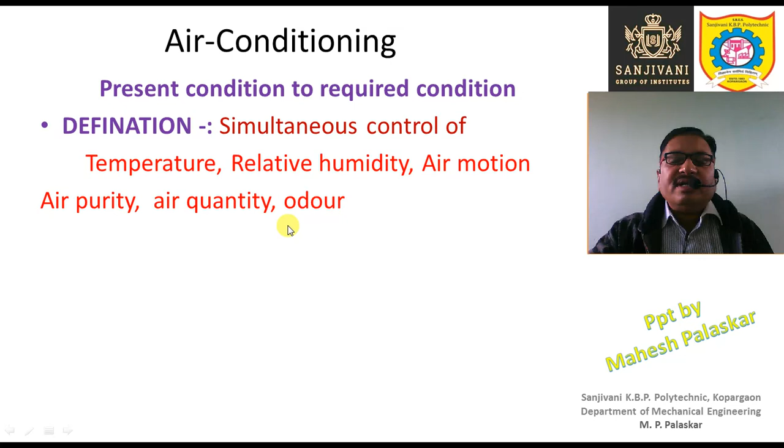These parameters are temperature, relative humidity, air motion, air purity, sometimes even air quantity or the density or the pressure of the air, and also in some cases the odor or the fragrance of the air. So all these factors are simultaneously controlled, and that is nothing but air conditioning. So simultaneous control of temperature, relative humidity, air motion, air purity, air quantity, odor is called as air conditioning.

Now air conditioning may be comfort air conditioning or industrial air conditioning. So for human comfort, mainly air conditioning is used. So what are the values of these various parameters for human comfort? The temperature should be between 21 degree centigrade to 25 degree centigrade for human comfort, and we are maintaining the relative humidity between 40% to 60% so that the human beings feel comfortable. Then the air motion should be between 5 meter per minute to 8 meter per minute, right?

So if the temperature is between 21 to 25 degrees centigrade, then we neither feel hot nor we feel cold. And if the relative humidity is say less than 40% or less than 35%, then we feel very dry, right? Or if the relative humidity is more than 60%, then the environment becomes sticky. Our body becomes sticky and we start sweating. So that environment we can experience in places like Bombay.

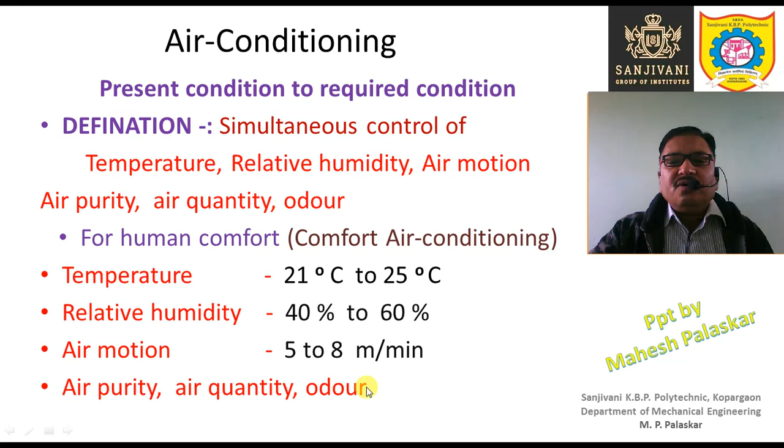And the velocity of the air should not be too high, not be too less for human comfort. So it should be between 5 to 8 meter per minute. Then the air should be pure. Then the air pressure or the quantity, that is the density of the air, should be optimum, around 1 atmosphere. Then there should be no bad smell in the air, or the unwanted odor should not be present in the air. So all these factors related with the moist air around us are controlled simultaneously, and that is nothing but air conditioning.

Now let us study the classification as well as the applications of air conditioning. So while studying the classification of air conditioning, we can also study simultaneously the applications of air conditioning. So first type of air conditioning is comfort air conditioning, or we can say one of the important applications of air conditioning is comfort air conditioning. Air conditioning is used for human comfort. So that air conditioning is used in the homes, in the hospitals, in the ICUs, in the restaurants, in the theaters, in the offices, etc.

Then next is the industrial air conditioning. So in various chemical, pharmaceutical and food processing plants like petroleum plant, tobacco processing, medicine, then the textile industries, then in the manufacturing of the beverages and the bakery products and the dairy products, air conditioning is used. Beverage means the various drinks like cold drinks which we are consuming in our day-to-day life. So in these various plants the air conditioning is used, and that is called as the industrial air conditioning.

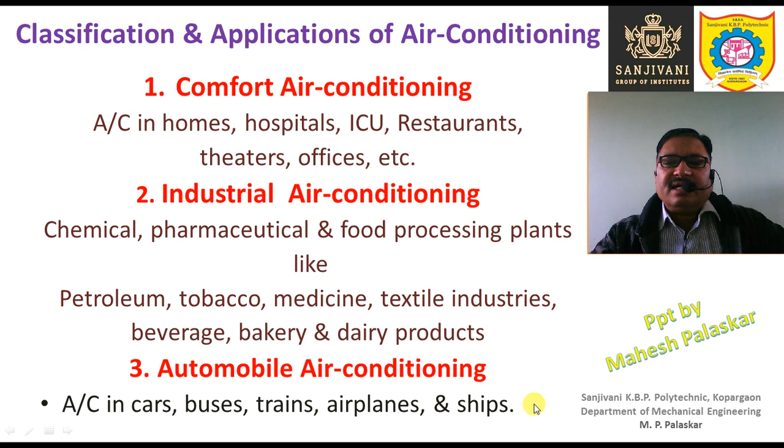So this was about the classification and the applications of air conditioning in short. Now let us study the basics of air conditioning. In the basics of air conditioning we are going to study psychrometry. Psychrometry is nothing but the engineering science which deals with the study of the thermodynamic properties or the psychrometric properties of the moist air, which is the working substance in air conditioning.

Then we are going to study Dalton's law of partial pressure, which states that the total pressure exerted by the mixture of gases is equal to the sum of the individual pressures exerted by each gas in the mixture of gases. Then we are also going to study the meaning of dry air, moist air and saturated air. Dry air is that air which doesn't contain moisture or water vapor. It is the mixture of nitrogen, oxygen, argon and carbon dioxide.

The percentage of nitrogen may be something like 78.03%. Oxygen present may be 20.99%, and the carbon dioxide present may be something like 0.03%. Argon may be present something like 0.94%. Then the moist air is nothing but the mixture of dry air and water vapor. When water vapor is present in the dry air, that is called moist air.

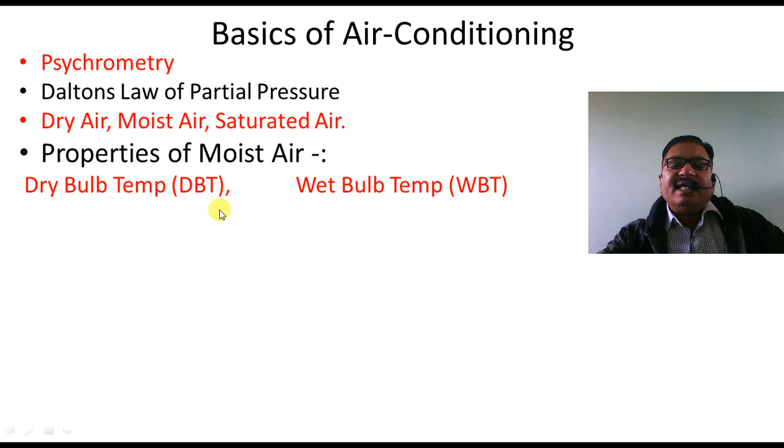Water will evaporate up to saturation, and the heat of evaporation will be taken from the bulb of the thermometer, and thus you can see that the wet bulb temperature will be less than the dry bulb temperature, okay, if the air is not saturated. Then we are going to study the wet bulb depression. Wet bulb depression is the difference between dry bulb temperature and wet bulb temperature.

So we are going to study all this in detail. Right now I am just summarizing what we are going to study, giving you a rough idea, but later on we are going to study each and every point in detail. So wet bulb depression is the difference between dry bulb temperature and wet bulb temperature, WBT. Okay, so WBT is the wet bulb temperature.

Then we are also going to study the dew point temperature. If the moist air is cooled at constant pressure, then at a particular temperature the dew formation will start, or the water vapor present in the air will start to condense out, and that temperature is called the dew point temperature. Then the dew point depression is the difference between dry bulb temperature and dew point temperature.

The specific humidity we are going to study. Specific humidity is also called humidity ratio, moisture content or absolute humidity. So the specific humidity omega is the ratio of the mass of water vapor in a given sample of moist air to the mass of dry air in the same sample of moist air at the same temperature and pressure.

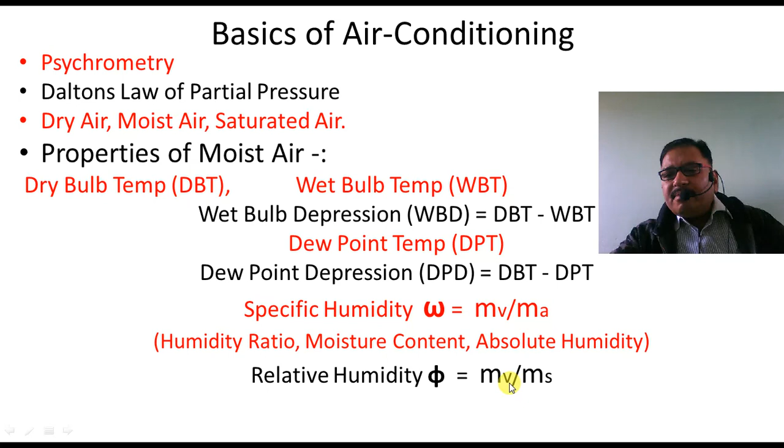Then the relative humidity is the ratio of the mass of water vapor of the given sample of moist air to the mass of water vapor in the same sample if it would have been saturated at the same temperature and pressure. Then the degree of saturation is nothing but the ratio of the specific humidity of the given sample of moist air to the specific humidity of the same sample of moist air if it would have been saturated at the same temperature and pressure.

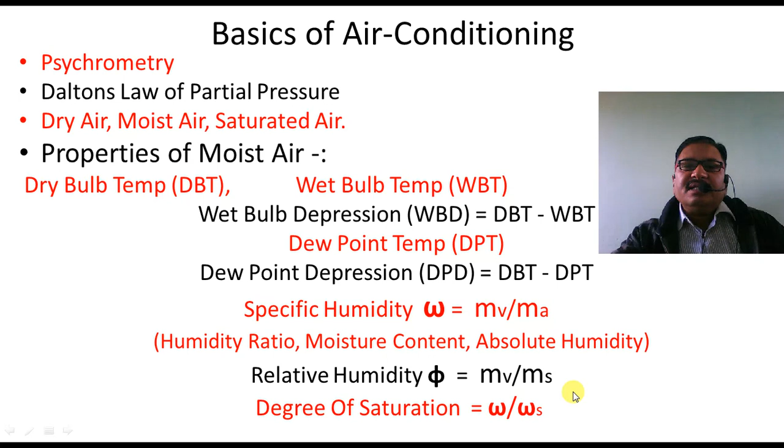So let us study all these points in detail one by one. So in psychrometry we are going to study first of all dry air. First of all we must know what is the dry air. So when we say the air is dry, that means air doesn't contain any moisture. That means no water is present, neither in liquid nor in the vapor condition. So generally water is present in the air in the vapor condition. So water vapor may be present in the air. So if water vapor is not present in the air, then that air is called as the dry air.

So then that dry air is the mixture of various gases like nitrogen, something like 78.03%, oxygen 20.99%, argon is 0.94%, carbon dioxide is 0.03%. Then the moist air is nothing but the mixture of dry air and water vapor, dry air plus water vapor. So moist air is the mixture of dry air and water vapor.

And now, after studying the moist air, let us study psychrometry. It is the branch of engineering science which deals with the study of the thermodynamic properties of the moist air. Okay, so we are studying the thermodynamic properties of moist air, and the branch of engineering science in which we are studying the thermodynamic properties or the psychrometric properties of moist air is nothing but psychrometry.

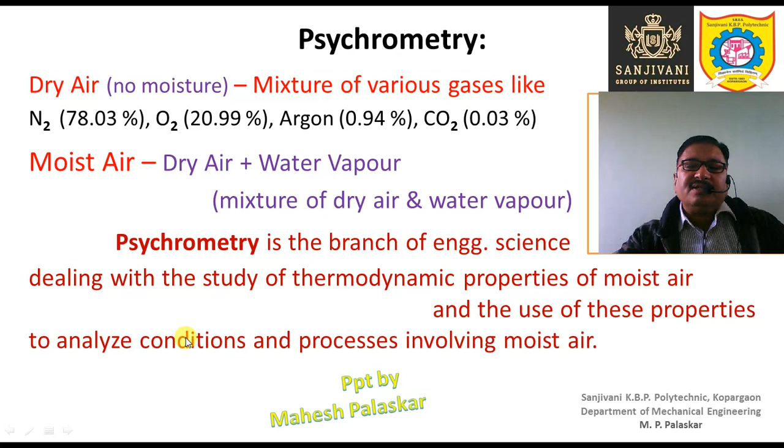And the use of these properties to analyze conditions and processes involving moist air is also psychrometry. So we are not only studying these properties, but we are using the study of these properties to analyze the various conditions and processes involving moist air. So various processes in which the change in the condition of the moist air is taking place, all these processes we are going to study under psychrometry.

Now the Dalton's law of partial pressure states that the total pressure which is exerted by the mixture of gases is equal to the sum of the individual pressures exerted by each gas. So when we have a mixture of gases, say gas number 1, 2 and 3 etc., and we add the pressures P1 plus P2 plus P3, the partial pressure of each gas, we get the total pressure which is exerted by the mixture of all these gases. So that is nothing but the Dalton's law of partial pressure.

And now let us define the saturated air. We have defined the dry air, moist air. So dry air doesn't contain any water vapor, moist air is the mixture of dry air and water vapor. But what is the quantity of the water vapor present in the air? That is important. And what can be the maximum quantity of water vapor present in the air? Does it depend on the temperature? Yes, of course, it depends upon the temperature. If the temperature is high, then the air can hold more water vapor. Beyond a certain capacity, the air cannot hold water vapor. So the percentage of water vapor present in the air is limited, and that depends upon the temperature. Okay. So if the temperature increases, the capacity of the air to hold the water vapor increases.

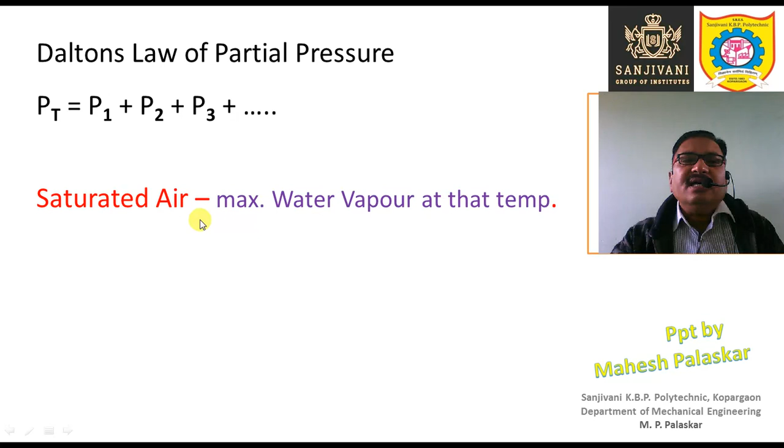Now some other terms we are going to study in psychrometry. We are going to study the properties of the moist air. The first important property is the dry bulb temperature. In short, it is called DBT, or it is also indicated like this: capital T with the suffix db, small db is the suffix. So that is the notation of the dry bulb temperature.

So what is this dry bulb temperature? In other subjects, we just call it temperature. But in psychrometry, instead of just calling it temperature, we call it dry bulb temperature, because it is the temperature which is measured by a standard thermometer when its bulb is dry, or when the bulb is not affected by the moisture or the water vapor. That ordinary temperature, measured by an ordinary or standard thermometer, is called the dry bulb temperature.

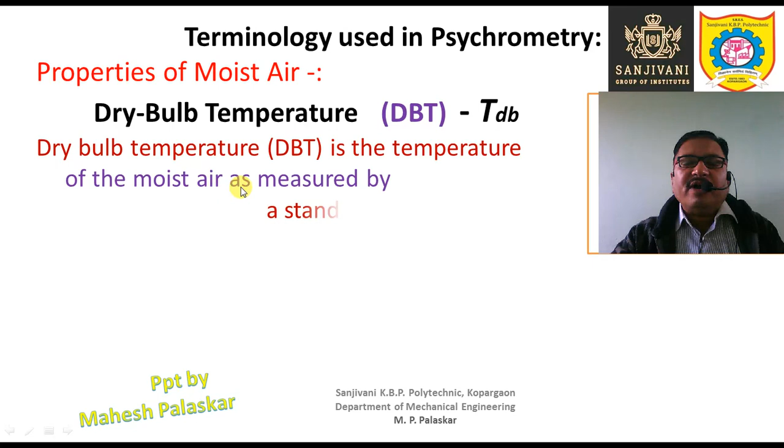So dry bulb temperature, DBT, is the temperature of the moist air as measured by a standard thermometer or any other temperature measuring instrument which is not affected by the moisture present in the air, or when the bulb of the thermometer is dry. So it is usually referred to as the air temperature. With dry bulb temperature, the sensible heat content of the air can be determined. If you know the dry bulb temperature, we can easily find out the sensible heat content in the air.

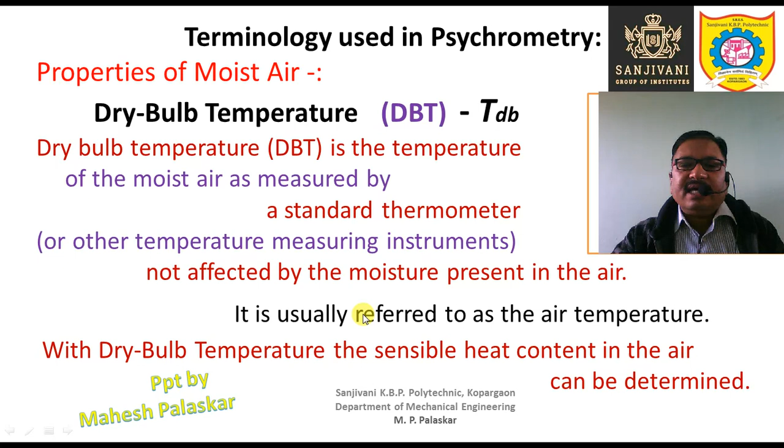Now next is the wet bulb temperature, WBT, or it can be noted like this: capital T with suffix small wb. So what is wet bulb temperature? Wet bulb temperature is the temperature of the moist air as measured by a thermometer, but when a wet cloth is tied to the bulb of the thermometer and it is sufficiently exposed to the air. So a wet cloth should be tied to the bulb of the thermometer, and this wet cloth should be sufficiently exposed to the air.

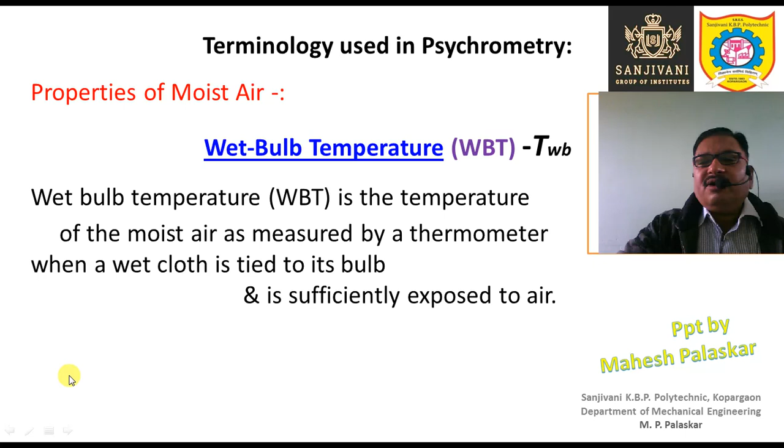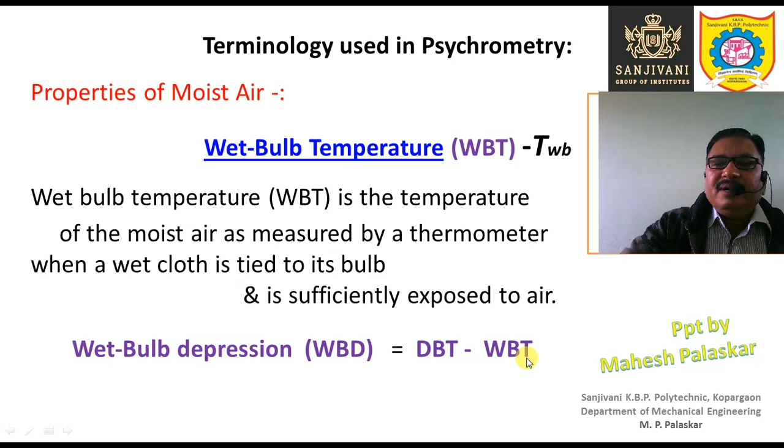Or we can swing this thermometer, whose bulb is tied with the wet cloth, in the air at a sufficient speed, so that there will be sufficient exposure, and the water present in the wet cloth will evaporate, and the heat of evaporation will be taken from the bulb, and that will reduce the temperature. Theoretically, it is expected that the saturated condition of the air should be reached, and that temperature is called the wet bulb temperature. Now wet bulb depression is the difference between dry bulb temperature and wet bulb temperature. The short form is WBD.

Now the dew point temperature, denoted by DPT or capital T with suffix small dp. Dew point temperature is the temperature at which water vapor in the air starts to condense if the air is cooled at constant pressure. So we are cooling the moist air at constant pressure. As the temperature decreases, the capacity of the air to hold the water vapor decreases. And a point is reached when, due to the decrease in temperature, the air cannot hold the water vapor which was present in it. So the air will become saturated, and the excess water vapor will start to condense out.

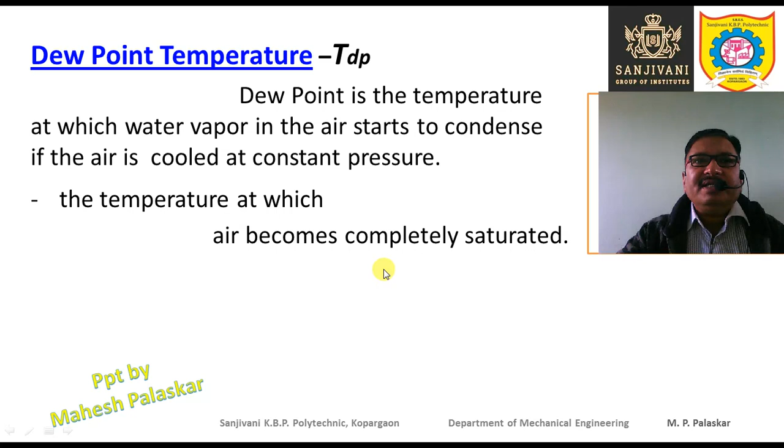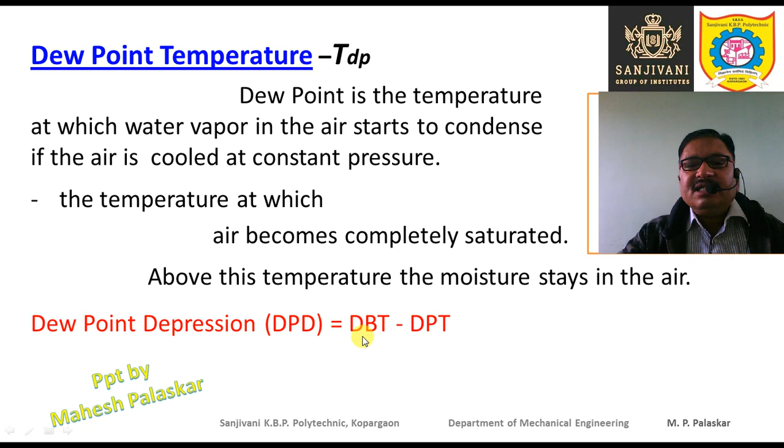So the temperature at which the water vapor starts to condense out from that moist air, if it is cooled at constant pressure, is called the dew point temperature. The temperature at which air becomes completely saturated is the dew point temperature. Above this temperature, the moisture stays in the air. If the temperature is increased, moisture will stay in the air, but at this temperature, moisture cannot stay in the air. Dew point depression is the difference between dry bulb temperature and dew point temperature.

Now the next property we are going to study is the specific humidity. It is also called the humidity ratio, moisture content, or absolute humidity. It is denoted by omega. The specific humidity omega is the ratio of the mass of water vapor present in a given sample of moist air to the mass of dry air in the same sample at the same temperature and pressure. Or in other words, specific humidity is the amount of water vapor by weight, in kg, present in 1 kg of dry air.

So if we take a mixture of air and water vapor, that is moist air, and measure the mass of water vapor and the mass of dry air and take the ratio, in that ratio the dry air should be 1 kg. So the amount of water vapor by weight present in 1 kg of dry air is the specific humidity omega, or humidity ratio, moisture content, or absolute humidity. So the moisture content of the air is expressed as the weight of water vapor per unit weight of dry air, and that is specific humidity.

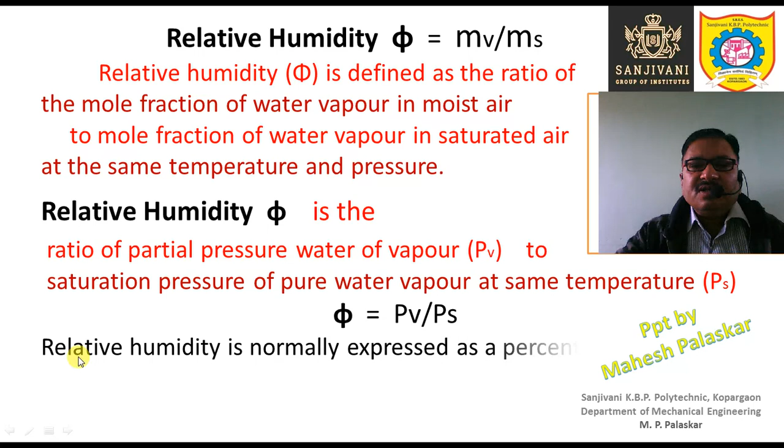So if the water vapor is saturated, then the pressure will be different, and that is called the saturation pressure, and the ratio of these two pressures is also the relative humidity of the moist air. So relative humidity is normally expressed as a percentage. When relative humidity is 100%, the air is supposed to be saturated.

Now degree of saturation. Degree of saturation is denoted by mu. It is the ratio of the humidity ratio or the ratio of the specific humidity. So degree of saturation is the ratio of the humidity ratio omega to the humidity ratio of the saturated mixture omega S at the same temperature and pressure, right? So this degree of saturation is the ratio of the specific humidities: specific humidity of the given sample to the specific humidity of the same sample if that sample is saturated at the same temperature and pressure, right?

So this degree of saturation is also defined as the ratio of the humidity ratio or specific humidity omega of the given sample of moist air to the specific humidity omega S of the same sample if it would have been saturated at the same temperature and pressure, right? So in place of humidity ratio, you can also say specific humidity or moisture content, because the meaning is the same, right? So this is the definition of the degree of saturation.

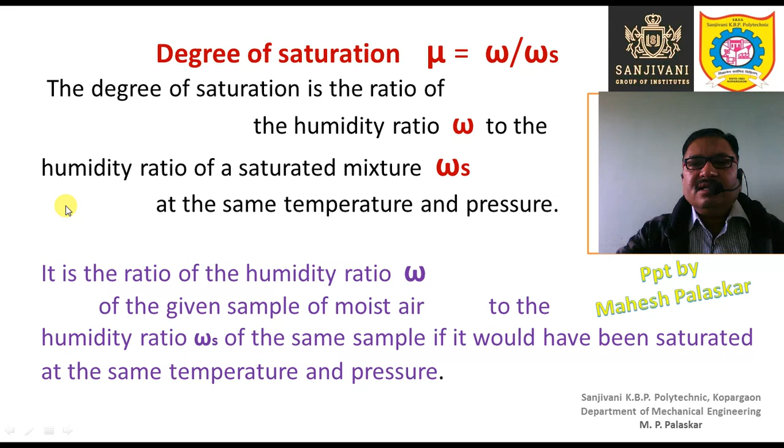So we have studied almost all the properties of the moist air, and now we are going to study the psychrometric chart and how all these properties are represented on it. Let us study the constant property lines on the psychrometric chart. So first of all, what is a psychrometric chart? Psychrometric chart is nothing but a graph on which we can represent the various properties. We can represent first of all the condition of the moist air, which will be represented by a particular point on this chart, right?

And the processes will be represented by the lines or curves along with the arrows indicating in which direction the process is being completed, right? So on the x-axis, the horizontal axis, dry bulb temperature or DBT is plotted on the psychrometric chart. Then on the vertical axis, specific humidity omega is plotted, right?

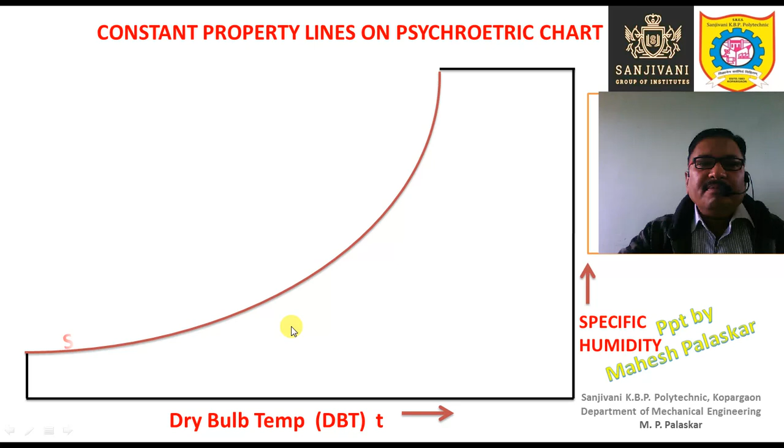Then we draw this horizontal and vertical line, and then we join these 2 points by a curve, and that curve is called the saturation line or the saturation curve. So this curve is called the saturation curve.

Now the constant property lines we are going to show. First of all, the constant dry bulb temperature line will be vertical, okay? So this vertical line is nothing but the constant dry bulb temperature line, constant DBT line, because the horizontal axis or the x-axis represents the dry bulb temperature. Dry bulb temperature is plotted on the horizontal axis. Therefore all the vertical lines represent constant values of dry bulb temperature.

So the dry bulb temperature at this point will be same as the dry bulb temperature at this point. That will be same as the dry bulb temperature at this point. On all the points dry bulb temperature will be same, okay? If we draw another parallel vertical line, then also the dry bulb temperature will be same, but the value will be different, right? It will be different, but it will be same along that line.

If this vertical line is drawn to the right, then the dry bulb temperature will be increased. If this line is drawn to the left, then the value of dry bulb temperature will be reduced, less dry bulb temperature, right? But it will be constant along the line. Okay, so this line is the constant dry bulb temperature line.

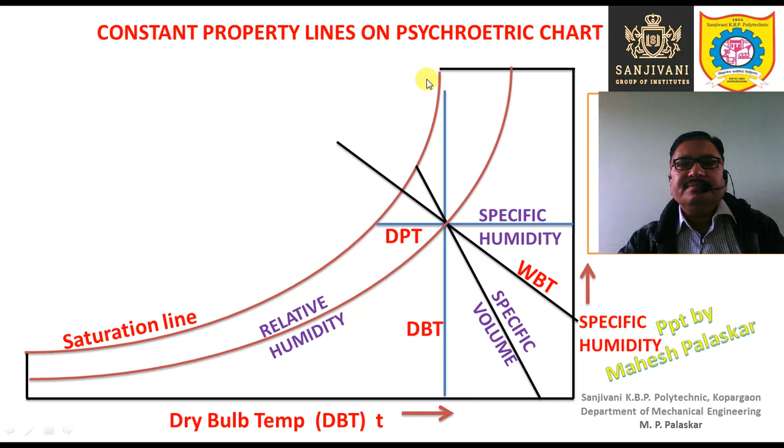So this curve we can say is parallel to the saturation line. Saturation line means relative humidity is 100%. Air is saturated, so the air doesn't have further capacity to hold the water vapor. So it is called saturated air, right? But here this air is unsaturated, but the relative humidity will be constant. Suppose here the relative humidity is 60%, so along this curve, at all the points, the relative humidity will be 60% only.

If you draw another curve here like this, it will be less than 60%, but constant along the curve. If you draw a curve like this between these 2 curves, then the relative humidity will be more than this value and less than 100%. Okay, now this is a constant wet bulb temperature line, at the same time a constant enthalpy line, and here we have the enthalpy scale which is perpendicular to this. So we can also find out the enthalpy of the moist air.

So these are the various properties of the moist air, and these are the various constant property lines shown on the psychrometric chart. I have shown only one line each. In the actual chart there will be a large number of lines drawn in a dense manner, right? And that is the actual psychrometric chart. This is the skeleton psychrometric chart, in which I am showing you sample constant property lines.